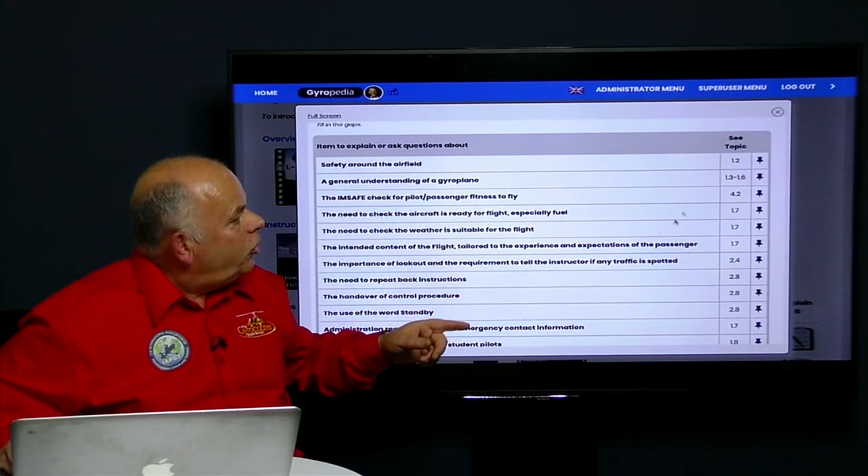But here's the other thing that's really important. Reading my notes doesn't really help you. You need to make your own notes, and be able to refer to them. On the right-hand side, you can click a push pin, and now you can enter your own notes, whatever you want, and save them, embedding stuff into the Gyropedia that makes sense to you. Because people reading my notes doesn't help them as much as making their own. Follow through that, and voila, you can learn to prep for a lesson very quickly.

There's a whole load of things to do with instructor training, and I'm not going to go into that. We'll save that for another day.

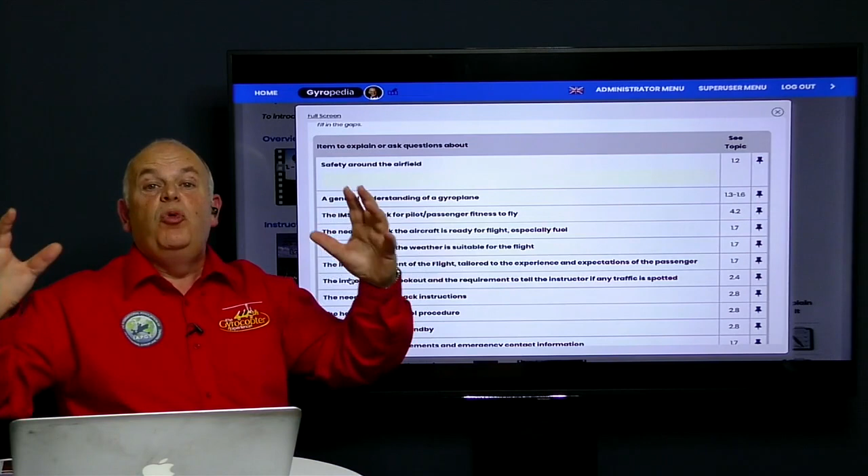What we are going to do is look at something that's available right now for everybody, and this really is a piece of magic. I'm going to go back up to the home screen and pick some lessons. We've got a great big simulator at York. If you've been on the home page of IPGT, you will have seen the technology in a full motion simulator. But what you really want to do is run that in the Gyropedia over the web.

This is what we've started to do, and it's tied to each lesson. You go into a lesson - this is the normal gyroplane pilot training material you're already used to. You can see the list of lessons, nothing new at this point. We'll click lesson 2, because that's the first one we really do something with. We scroll down to the introductory videos and posters you've seen before. Incidentally, the posters were all refreshed about 3-4 months ago, so if you were used to them a few years back, it's worth a look since they've all been updated.

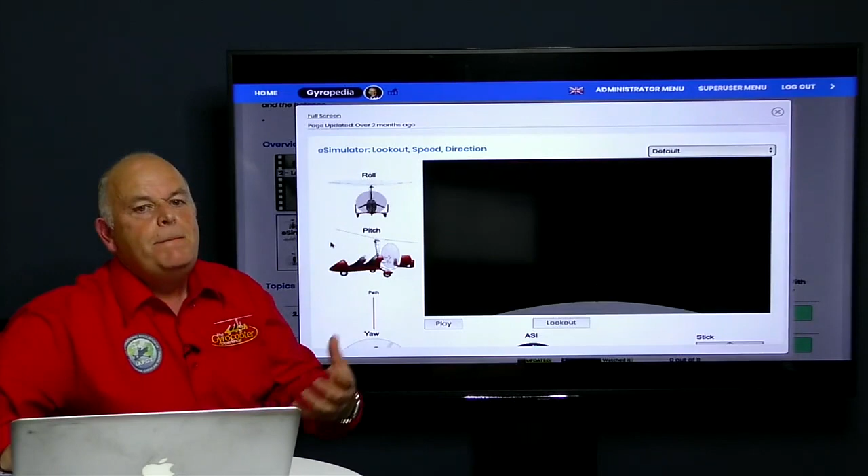But here's the piece of magic. If we scroll down, we find something completely new: an e-simulator. What does that mean? It means a simulator embedded with computer graphics. I'm going to go full screen here, and you can see this lesson starts when you're in the cruise. Lesson 2 talks about roll, pitch, and yaw - flying by horizon, flying by attitude, looking at the airspeed indicator and the controls. This used to be done just with computer graphics.

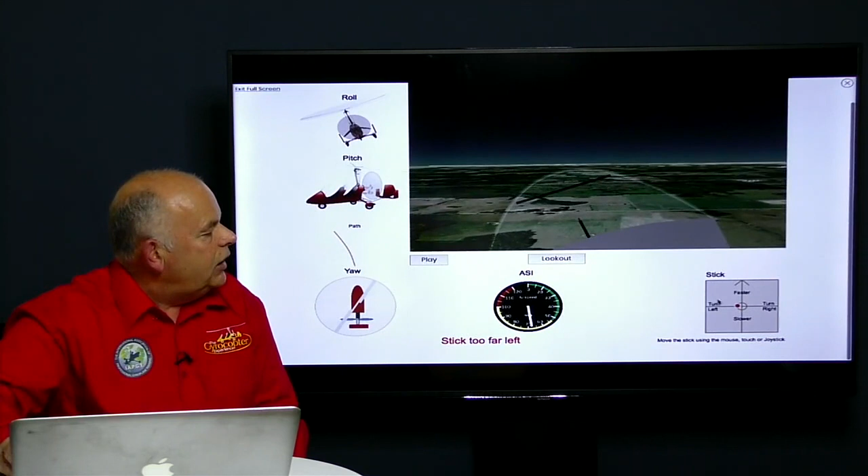Here's where the magic comes in - that's a bit of Google Earth. If I use the mouse to grab the stick and move it to the right, you can see the ground is actually moving. If I move it to the left, we move to the left. If we move the stick too far, the instructor gives you messages, and if you go even further, it'll actually take control back off you. What's really awesome is if we run this in our full motion simulator, all the controls move. But I'll show you at the end of the show how you can build your own mini version at home that works live right here in the Gyropedia.

So far it's been in static mode, and you might think that doesn't look too exciting. Well, there's a play button here - we click it, and now we're actually moving forward through Google Earth, moving right and left. We can also see what's happening with roll, pitch, and yaw, and what's happening with our airspeed as we move the stick back - we can see the airspeed decays with a delay.

And if we move the stick forward, you can see we get our normal attitude and the airspeed increases. Remember, this is about teaching a lesson.

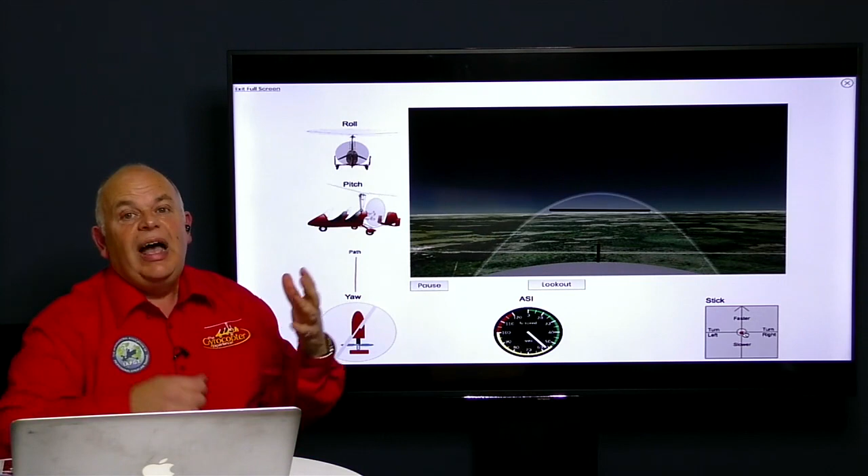Now, the beauty of this is that it's tied to Google Earth. This looks a little bit mundane, it's just an area that probably doesn't mean much to you, and you probably can't tell where this is in the world. Well, watch this and be amazed.

When we're working with instructors, we allow them to configure it for their local training area. So if you're flying at the school in York, you're going to be at York. If you're flying Hawaii, you're going to be at the school in Hawaii. And if you're flying with Henry in Los Angeles, you're going to be in Los Angeles.

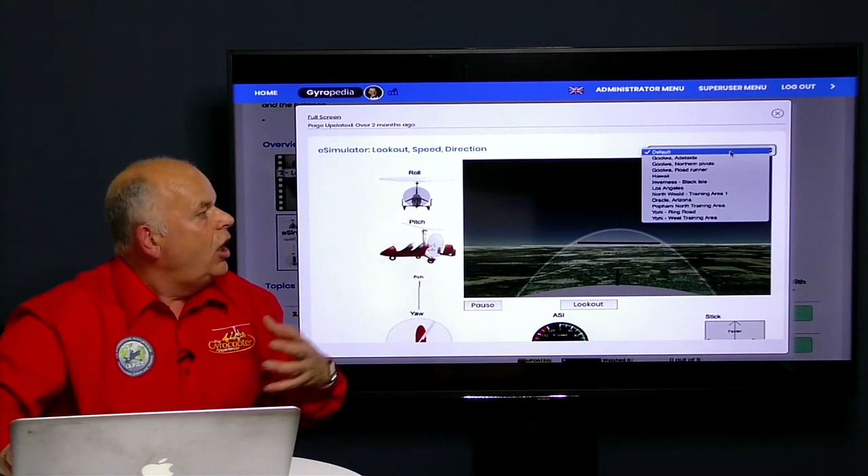You don't believe me? Let's have a look. Your students, or if you're a student, whoever instructor you're linked with, you're going to get their training area. Let's go on to the full screen.

Top right-hand corner, you can see if I go to Hawaii, because Mark was on the course in Arizona - there we go, we're now flying down the beach in Hawaii. Isn't that just awesome? That's live Google Earth, and we can fly round, left and right, at the element of the lesson we're actually in.

I'm going to go into more lessons in a minute. So if you have been on instructor training recently, we will have configured this for you. I know that the guys down in Australia - and I know you're watching, good morning to you, because it's actually Saturday morning for you - have configured this, and I can tell you've had some awesome fun with it.

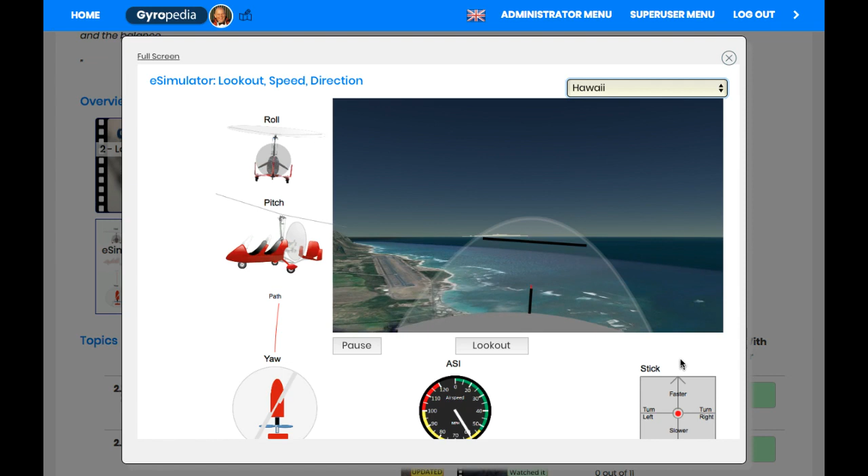Let's show everybody where David flies, because we are in Goolwa down in Adelaide. Here we go, this is David's home airfield. He's flying to the beach. So if you're flying with David Owen down in Australia, that's exactly what's going to happen.

And all the lessons are configured in that way. It is just phenomenal. So remember, if you're an instructor, you can configure your own local training area, and your students will be live in your actual area. And that is worth doing.

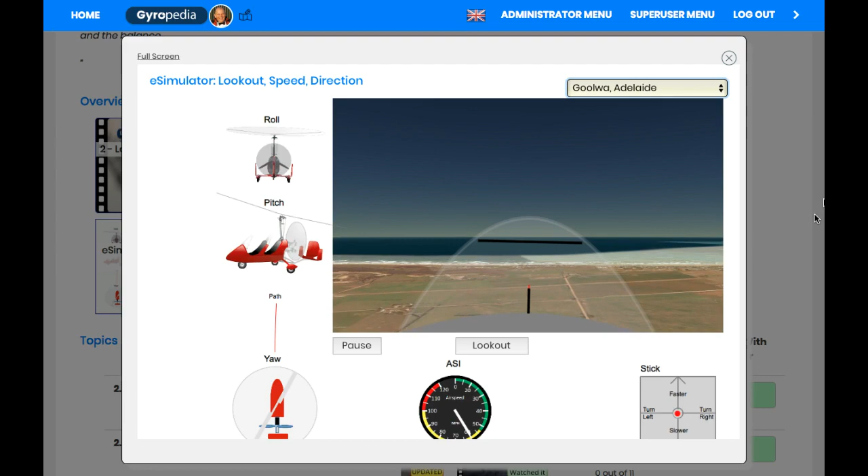Remember, at the end of the show, I'm going to show you how you can build your own little mini sim. So let's close that down for the moment and see where we are. So that was a simulator. I'm going to now go to lesson 3, because lesson 3 is where we introduce trim, height, and balance.

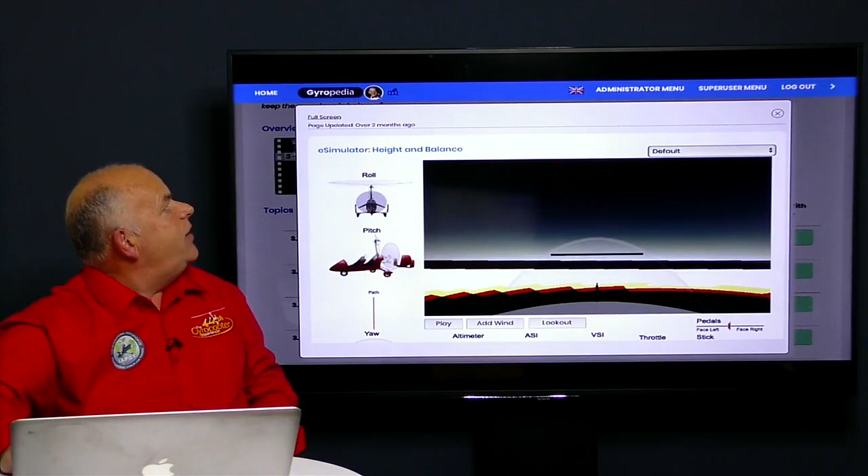So I'm going to go into the simulator now. Here it is, it's called the eSim, and it's going to be very similar, but you can see now I've actually got more instruments. And that's because this lesson is where we introduce these instruments. So it looks similar, but we've got more instruments.

Now we've got a throttle. So if we move the throttle, we can see we're actually going to start climbing. And if we reduce throttle, we're going to start descending. Now, the experienced pilots amongst you are going to say, what about the secondary effects of controls?

Fear not, lesson 5, it's awesome - all the secondary effects of controls come in. When it comes to turning, you know what? It's not going to start descending when you enter a turn. That's the whole point. It's a way of teaching a lesson, and so the simulator reflects where you are.

But here's something else. We've got the ability to look out. We've also got the ability to play as we did earlier, but we can also add wind, because we know that in real life, it's all about coping with wind.

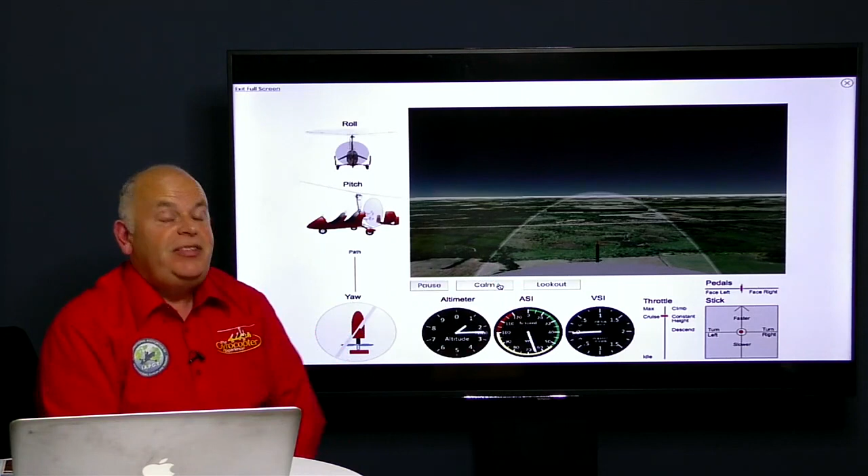I'm going to stick some thermals on here. What's going to happen is we're going to see the VSI changing quite significantly on its own. Of course, it's not going to do it right now because we're on a live demo. But see, when you do this - here we go, it's moving now. The VSI is moving, and it's your job as the pilot to adjust the throttle in order to keep a level altitude.

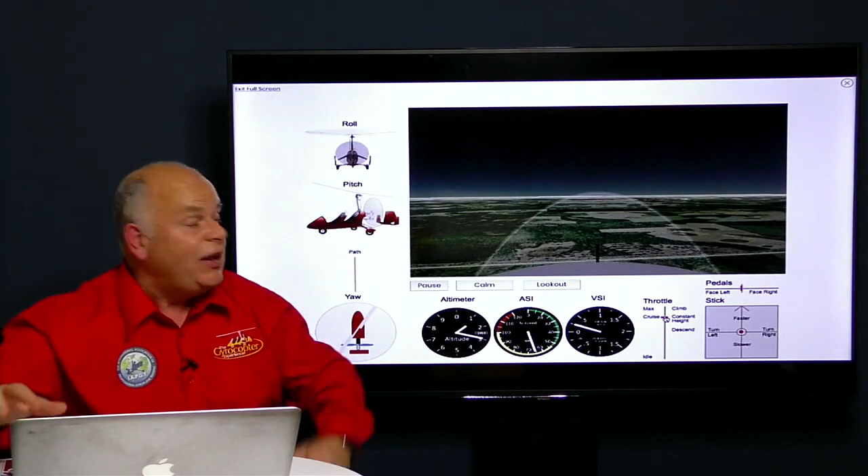Now, as I say, with thermals on, it will go up to about 500 foot a minute, both in climb and descent. It's just deciding not to do it right now this minute. Because, there we go, we're on a bit of a climb now. It's all random and it's all in roughly real time. So now the lessons take on a whole new meaning, and that is great.

Want to have a quick look, just one more, because I can tell that you're all so excited by the messages coming through - the word awesome has come through 3 times now. I'm going to close that down and do one more.

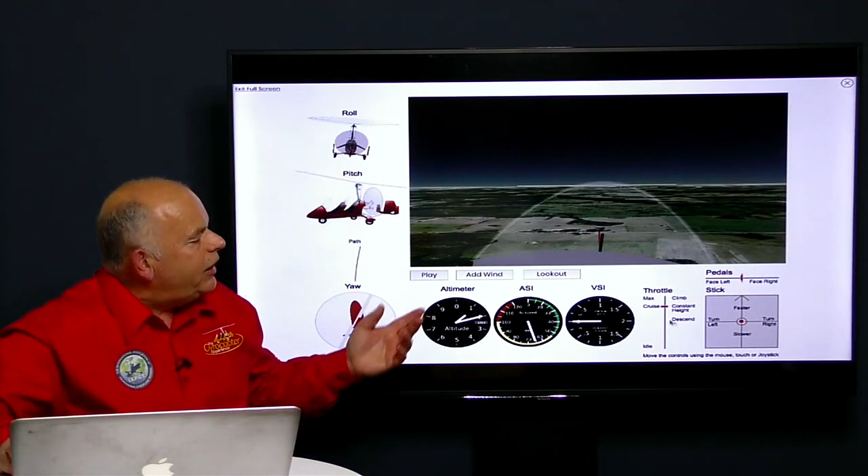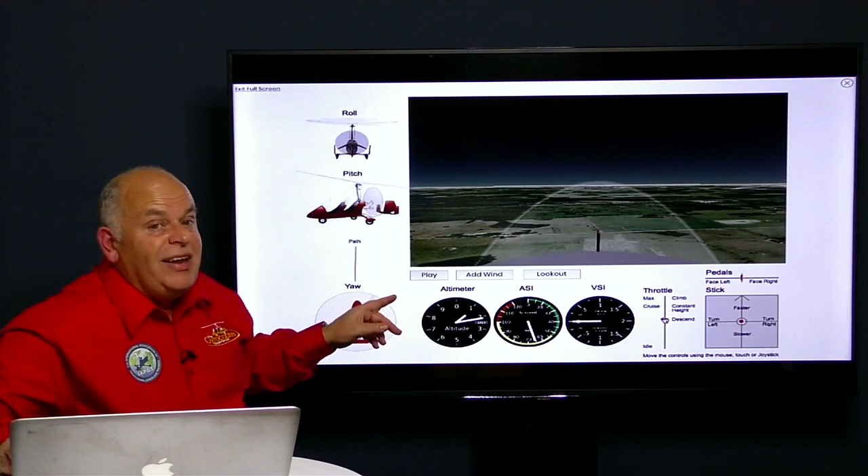I'm going into lesson 5. Here we've got the same thing again, but now we've got secondary effects. What does that mean? Watch as we move the throttle. We're actually going to change some roll and some yaw at the same time. Being quite excessive with throttle here, wouldn't necessarily do that in real life, but it's great for understanding what's happening. This really takes the training material to a whole new ballgame.

But there's more. That's the E-simulator. There's something else which can top that, and that's called an E-demonstrator. This is really the big difference. I've saved the best till last.

I'm going to go back to the main screen now, and I'm going to start from scratch. Now, this next bit is available to instructors who've got the instructor package, because it's something that you use with students. So if you're a student training with one of the instructors that uses the Gyropedia as their main training tool, then you'll be able to do this.

Watch, this is amazing. I'm going to go into the training material. I'm going into the Instructor Toolkit. Remember, here we go, Instructor Toolkit, Flight Training. I'm going to pick lesson 14.

What's lesson 14? Well, lesson 14 is takeoffs, but we don't actually climb out. We're going to fly along the runway, pop into the air, build up airspeed, and then land ahead and backtrack. So that's a really important lesson. Learning to take off is really important, but watch how we break it down.

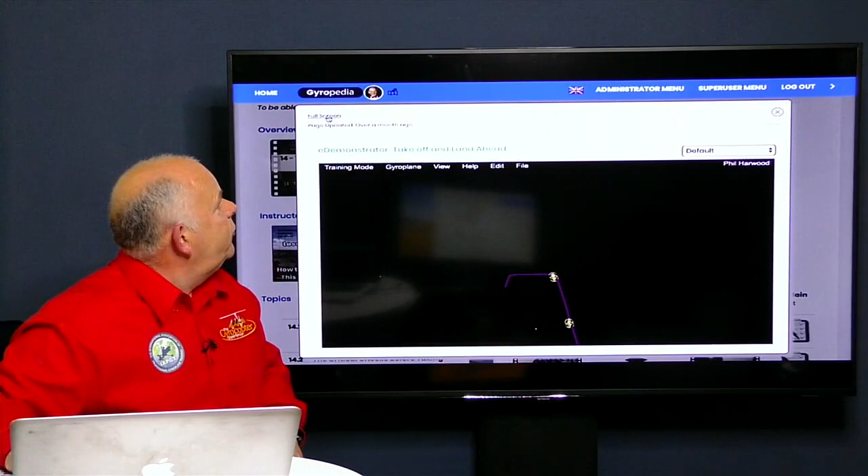So first of all, I'm selecting lesson 14 from here, and I'm selecting something called an E-demonstrator. The E-simulator is where you control it. The E-demonstrator is different. I'm going to pick this up here. I'm going to stay at the default airfield, and it'll just take a little time to load.

Now, if you're one of the USA people watching this, and I know there's a number of you watching from the USA, can you recognize this airfield? Come on, look closely. I'll zoom in so you can see it more. Can you see anything different? Runway 36, some salt fields at the top. If you've ever been to Bensen Days, you'll realize that they are at Wauchula Airport in Florida. So this is Wauchula Airport.

Now what we're going to do is use this, and I'm going to turn on some buttons to navigate it. We're going to fly down to the start of this exercise, and here I am behind our very first MTO Sport, because that was my first gyroplane, and here we are sitting just ready to line up.

And we've got this jigsaw piece. Well, if you're used to Gyropedia, you'll know about all the skills that you mark off in your training course. Think of each of those as a jigsaw piece. As you go past each jigsaw piece, you just discuss with your instructor, and I'll show you this shortly, what you do at each point in the process. When you've covered each jigsaw piece, then voila, you have mastered flying.

So what's going to happen? First of all, I'm going to go into a demonstration of this actual exercise. This tool has 3 training modes. I'm going to go into the flight demo only, and I'm going to just press play. I'm going to put it on full screen and just narrate through it.

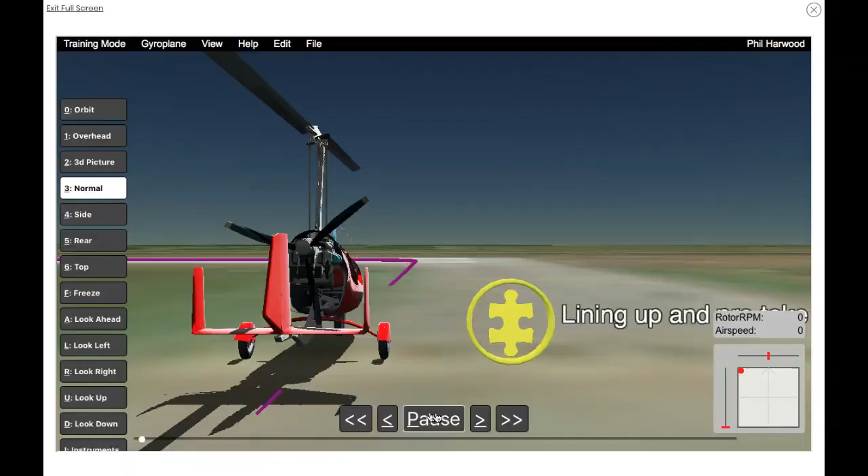But what's happening now is we're lining up on the runway. In the bottom right-hand corner, you can see the standard controls. The big square is the stick. The line above it is the pedals. And to the left, you've got the throttle.

Now, when we've lined up, there's three things we do. We pre-rotate. You can see it's pre-rotating at the moment. We're just in demo mode here. So it's pre-rotating, here we've got the rotor RPM to about 200. And now the rotor is going to accelerate. There we are, we're adding power, and the stick comes back and you're going to set off down the runway.

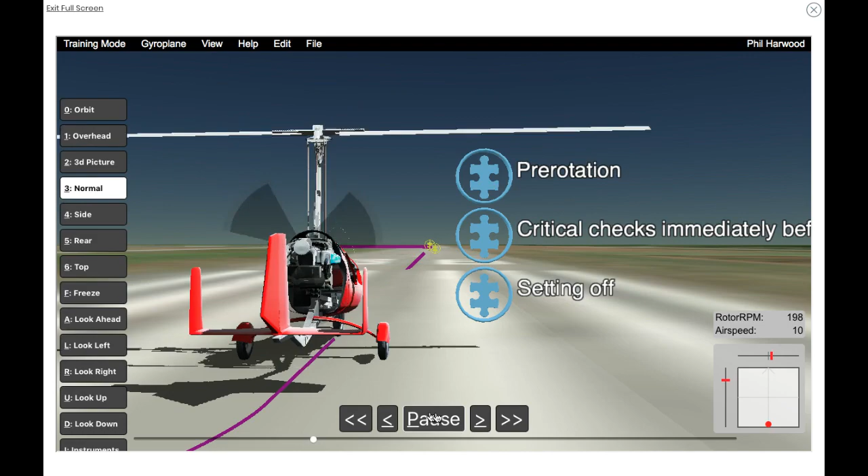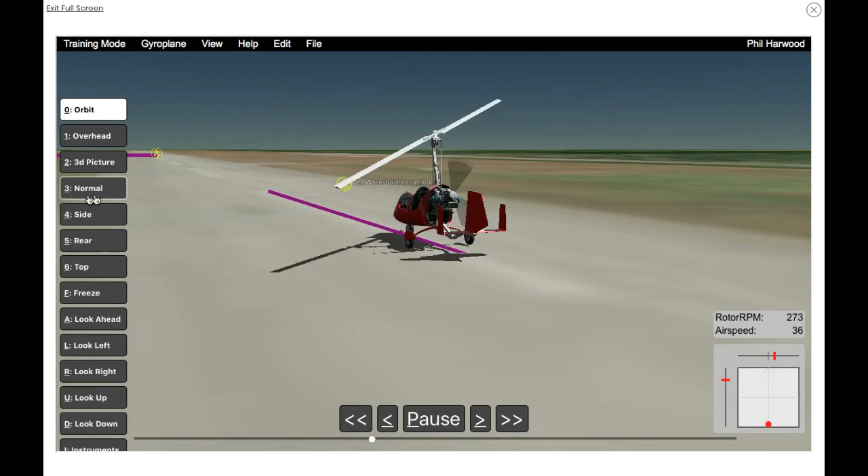So here we are. I'll show you how you use this in a minute. But we are just about to set off, and that's us going down. What we're going to do is a little bit of zooming now so that we can model this. I'm using the keyboard here to select the different views. And you can see we're coming to the point where, if we get here, we're coming to the wheel balance attitude. So there's the wheel balance attitude. You know what?

I'm going to click side view now so that I can see the side view of the gyroplane as we're going down. We're going to come across, that's us in the air, and now we're in the picking up airspeed mode.

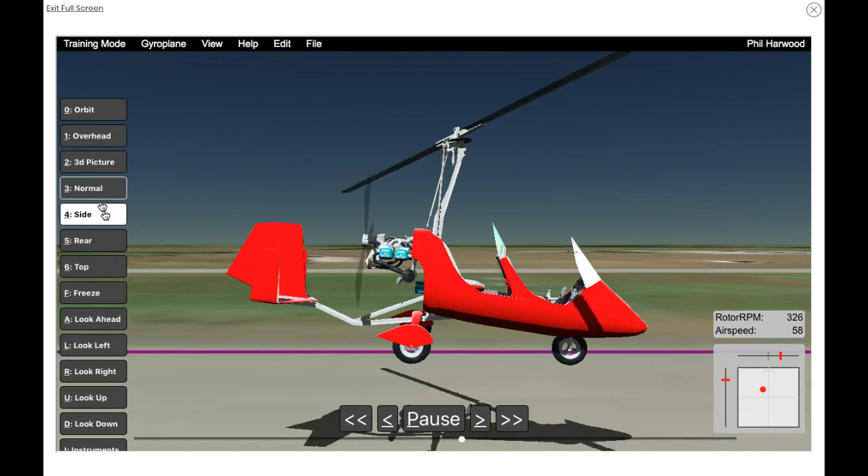Now we can actually be inside the aircraft. We can look down at the instruments, and we can see the instruments with a shadow there. If we turn off shadows, you would see them clearer.

And now we're going to pass the decision to land ahead, and we're going to land at this part of the runway, and then we are going to backtrack. So here we've got the first use of the tool, where we've used the Gyropedia and this new graphic to actually demonstrate what's expected of the exercise.

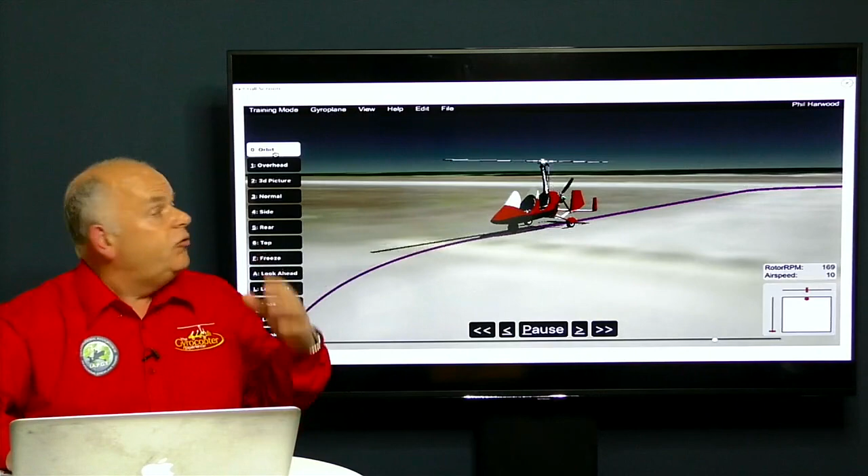This again can all be configured for your airfield, and it can also be configured for different models of gyroplane if the manufacturers help us get the models into the actual gyroplane.

I know, Paul Adams, you're not there tonight. You're with the Chilton boys and you're out down the pub on your Christmas party, but you're going to be watching it and catch up, aren't you?

Well, we put in your aircraft, or certainly as it was when you first got it, and you can see that the aircraft is now color-coded to the yellow and blue, and it will allow you to color-code the gyroplane to your actual color code for a school aircraft, or if you're a pilot, you can have this for your own aircraft. Isn't that just wonderful?

Okay, what we're going to do now, I'm going to restart and I'm going to use this tool as it would be expected to be used for training. In this, I'm going to go to the training mode. I'm going to change it to the Gyropedia teaching mode.

I'm also going to pull up a student and want you to notice this jigsaw piece, which is currently yellow, is going to change color. As I've selected a different student, I'm using my demo student here who's called Terry Robbins. I'm now emulating a student. It's turned blue, and that's because in his training records, he's been trained to do this, but he's not got to a level of competence.

So how do we use this? Well, as an instructor, I'm just going to go, Terry, what do you think about when you're lining up? So assume that you've done your mag checks, assume that you've got your engine warm, you're just about to line up. What is it you're thinking about?

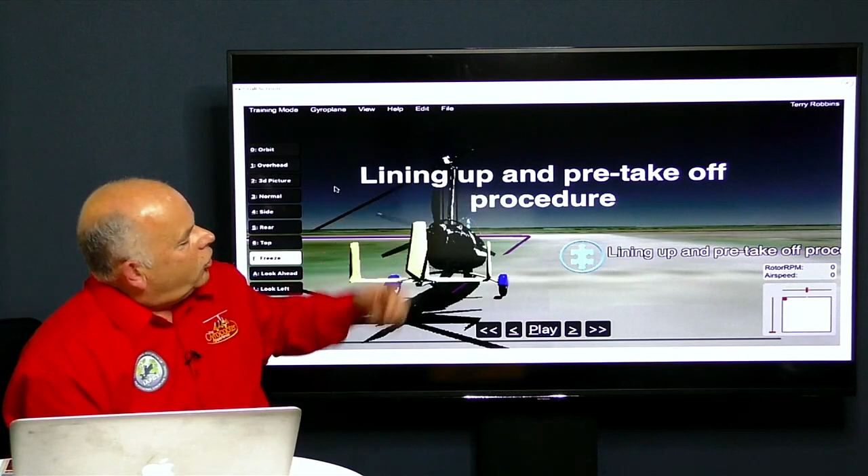Now without your instructor, you can click this and it's going to ask, Terry, what do you do when you line up in pre-takeoff? What's the lining up and pre-takeoff procedure? You try and remember what the notes were, but you need to get to the point where you're actually just rattling through it. So you simply click the space bar, and it comes up with your notes as if you'd created a PowerPoint presentation. It says, look for traffic, and then you ask, what's the next thing? I can't remember what the next thing was. It was ensure the stick is appropriate for the wind, and then you come up with that, and move on to your next position. That exact same thing happens all the way through.

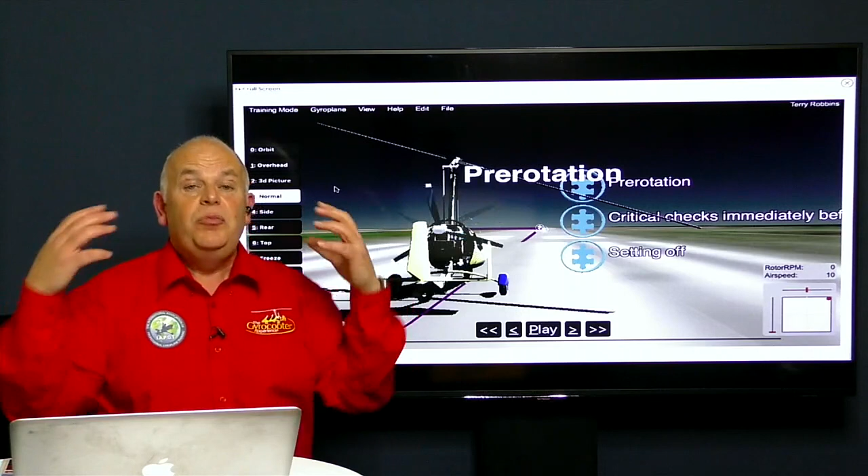So to summarize, you're able to sit in your aircraft at your airfield and bring up each of the lessons. You get it demonstrated to you, with all the different things to do with wind. If you change the wind, all the stick positions change dynamically. You can do it in crosswind, strong wind, all that works. But the real important bit is, as you go through the pieces of the jigsaw, you can enter your notes and build your own presentation, which means you can run it again and again. And if that doesn't save you a huge amount of time, I don't know what else will.

That's an e-demonstrator. That's the biggest thing happening in the Gyropedia in 2020.

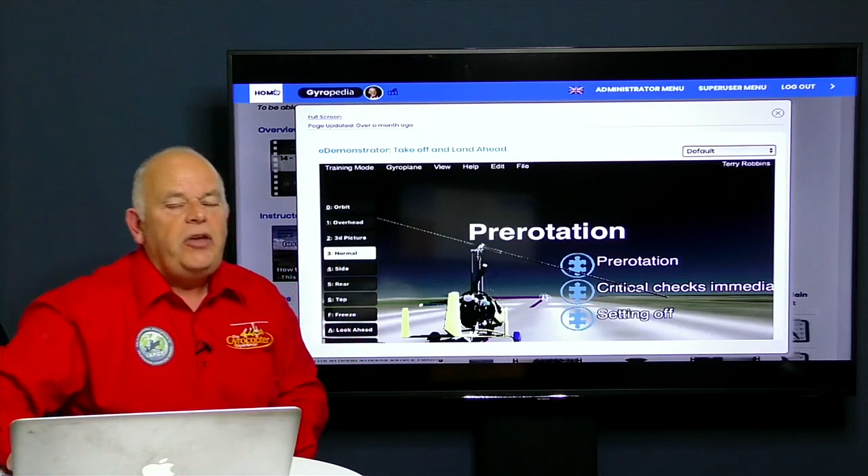One question is to do with the logbook - the pilot's logbook. It's difficult to find something if you've got thousands of flights. Do you know there's over 65,000 entries in the Gyropedia, which are flights or training? 65,000 - that's pretty awesome. And before you ask, yes, it is backed up very, very often, so don't you worry. So we're going to look at the logbook.

I'm going to go home - this is something you might not know. We're going to go into the logbook. You can go in through here, or you can go in via flights. So we're going in via flights, and we're going to look at the pilot's training logbook. The logbook here has lots of entries - I'd left the filter on, I've just spoiled my big reveal. So you've come to the logbook and you're wondering, how do I find something?

Well, you should have been watching and you'd know there's a thing here called Show Filter. If we put on a filter, we can search this logbook in many ways. For example, if you've printed out your logbook recently and just want entries from the start of the year, I've simply added a start date, and here we've got the flights done since that date. So we can look by date.

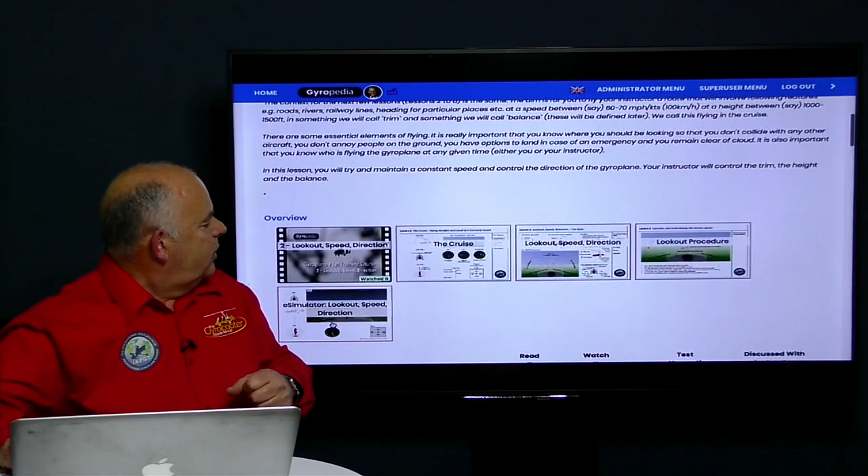Let me just pull up the sim again so that you remember what I'm talking about. I'm talking about the fact that you're able to control this stick and the throttles and pedals using an actual joystick. What we've also done is we've looked around to see what's readily available.

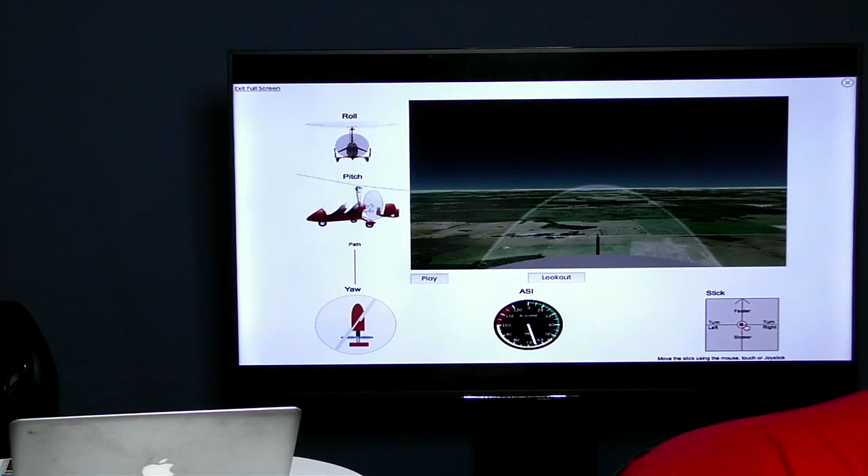So you can get your chair, you can put the throttle - but what's the third control? The third control is a set of pedals. So you get a set of pedals, you connect that as well, and these all work with these simulators that are already in the Gyropedia.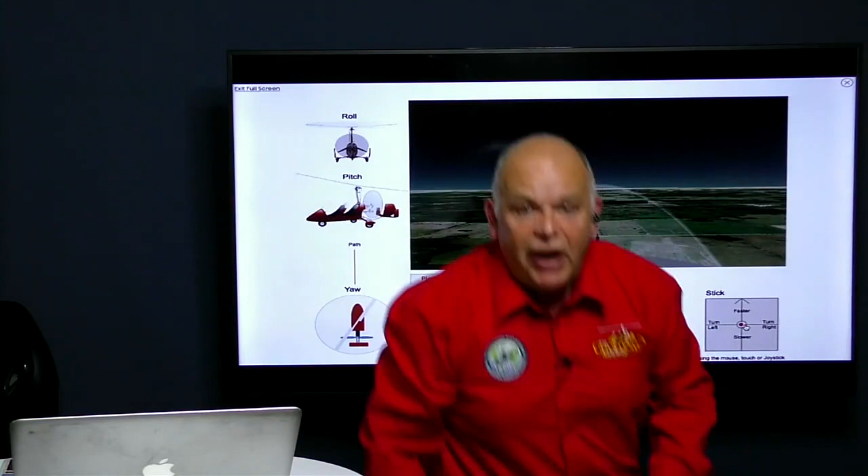We know a few people, the Newman family, who are watching from Sweden. Hello there, Gypsy. Hello there, Ingrid. I know you do this.

And so you've got your pedals, you've got your throttle, and you've got your stick, and you've got a chair, and you've got the 70-inch TV screen in front of you, and you're running them all from York. What is also fantastic is we can tie in using the web classroom technology, and I can be sitting here, or your instructor can be sitting at home while you're practicing on your simulator, and you can talk with each other. And coming in 2020, we're using the technique that we've got in the big sim, and we're going to build a standalone stick that means we'll be able to control your stick, throttle and pedals from across the world live.

So it will never replace training. We're not trying to replace training. What we're trying to do is say that when you get home, you can connect all this stuff up and you can practice. We've also got one to do with takeoffs and landings. I'm not demonstrating it because it's not finished yet, it's just not quite good enough. But it will be by this time next year.